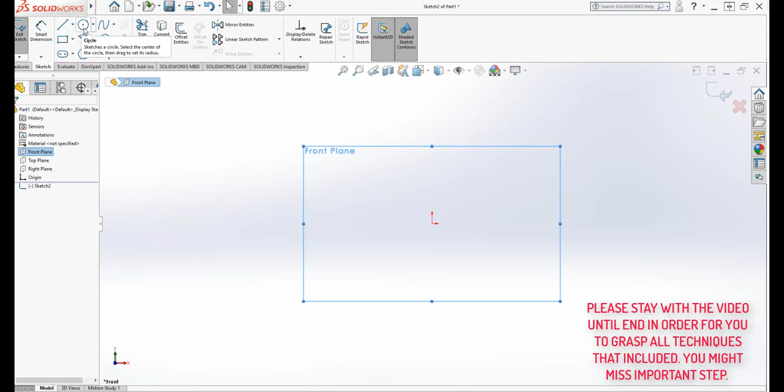First go to options, go to document properties, and use units with IPS, inch pounds and seconds. Press OK, close the dialog box, use smart dimension, and click the side of the circle.

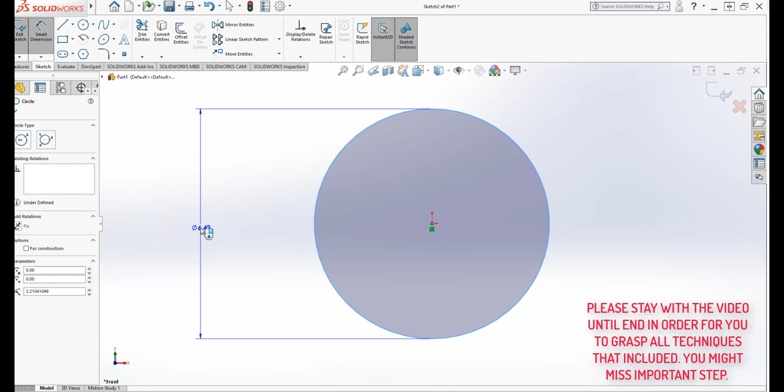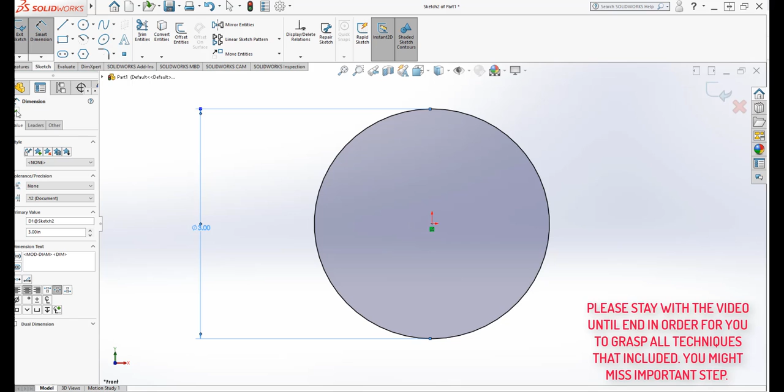It shows 6.42, but I wanted 3 inches. Press inch and regenerate the model with the current value. Press that one, click OK, and close the dialog box.

Now let's do another circle, a smaller one. Press the side, use 1.5 inch as the unit, press regenerate, and click OK.

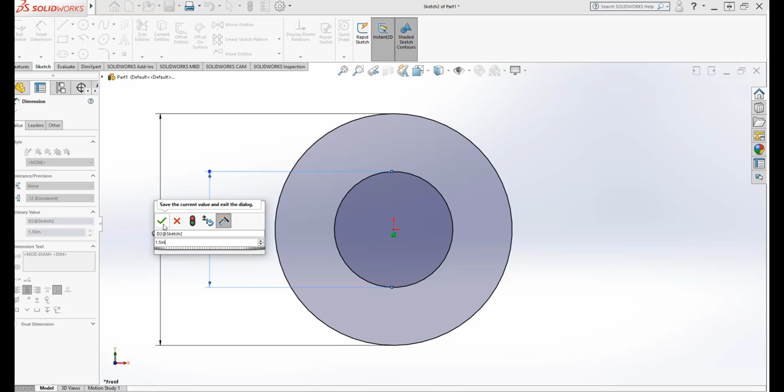Now we want to make it a solid from this drawing. Let's use extrude boss base, where I use mid plane every time.

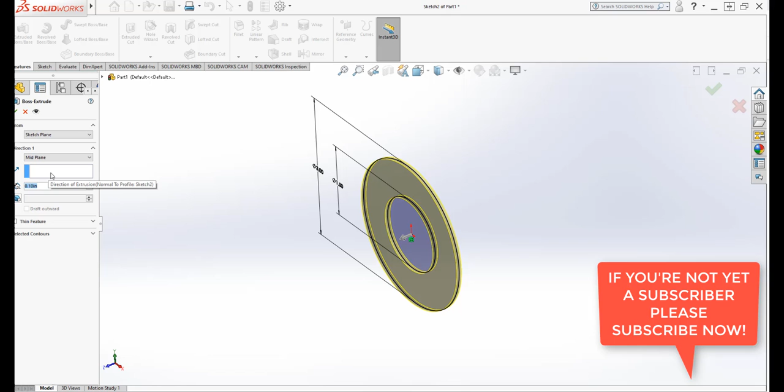Let's set the thickness of that drawing, maybe 2 inches. So that is 2 inch.

Press that one, or maybe we'll change it to 1.5 inch. So it shows the thickness I wanted. Press OK on the boss extrude dialog box, and now we've made a SolidWorks object.

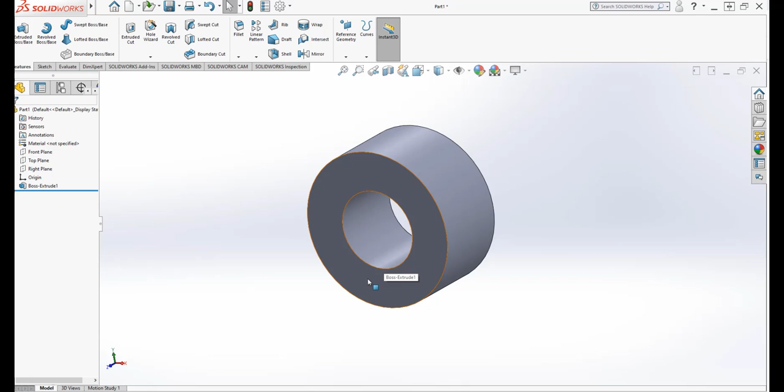Now I want some kind of key slot on this area. Press that one, go to normal to in front of you, and let's save the file first.

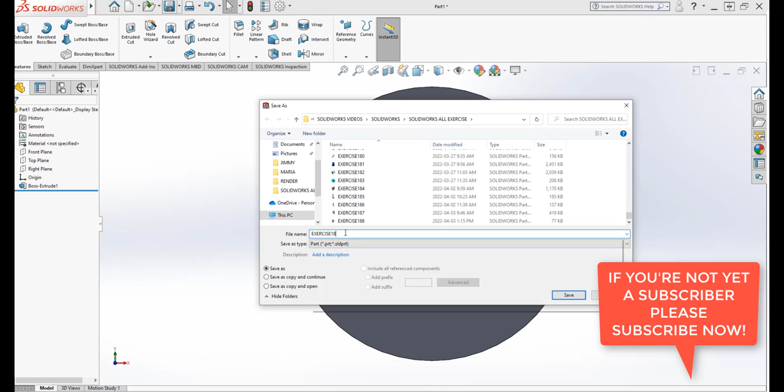Let's do the detail - this is exercise 189, so let's save it.

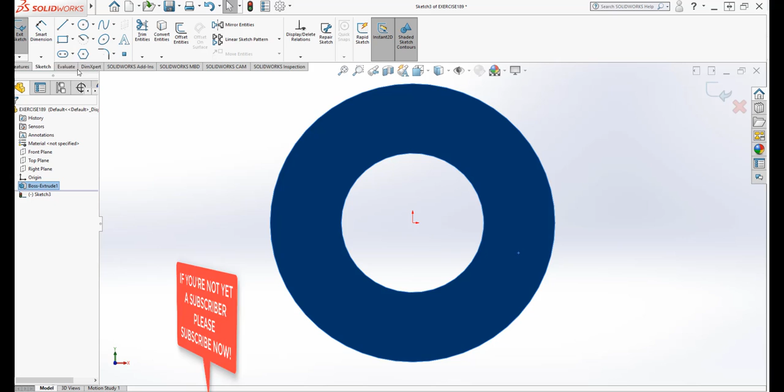Now let's do normal to, and then click sketch, and I want to have something like a corner rectangle.

Let's do a drawing from here, then use a center line connecting into the center and through here, and select.

Now use the smart dimension, let's put it as 0.45 inch. Press regenerate and click OK.

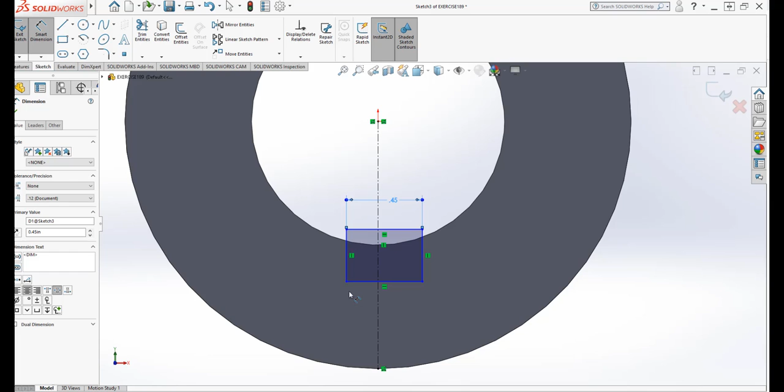I want this one in the center. Let's put the depth first - 0.45 also as the depth. Now they're all almost the same.

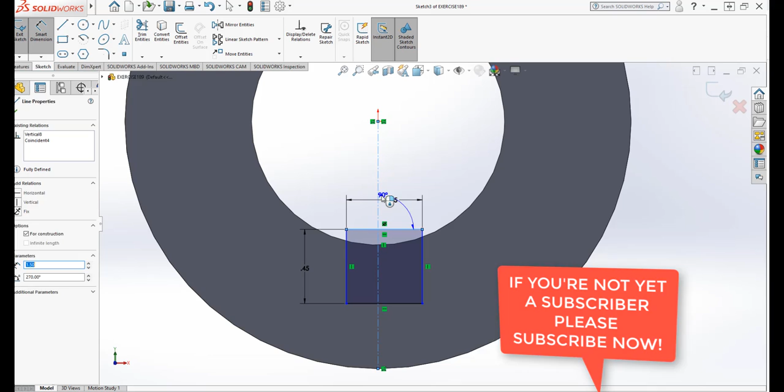Let's do some center, make sure from here, let's do some measurement again, from here to here - we'll make it 0.225.

Now it's centered. Then this one from smart dimension, let's do this one to here.

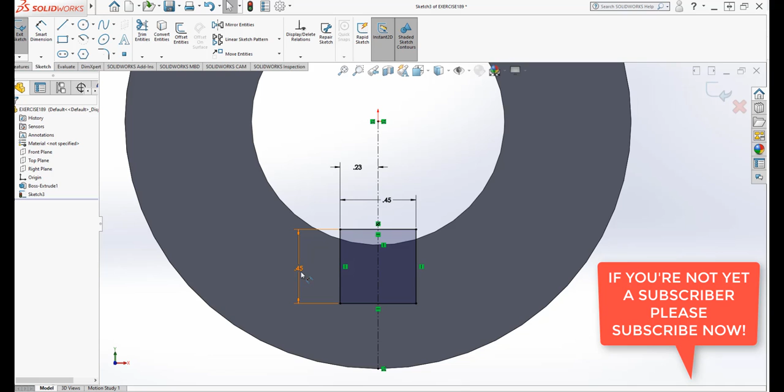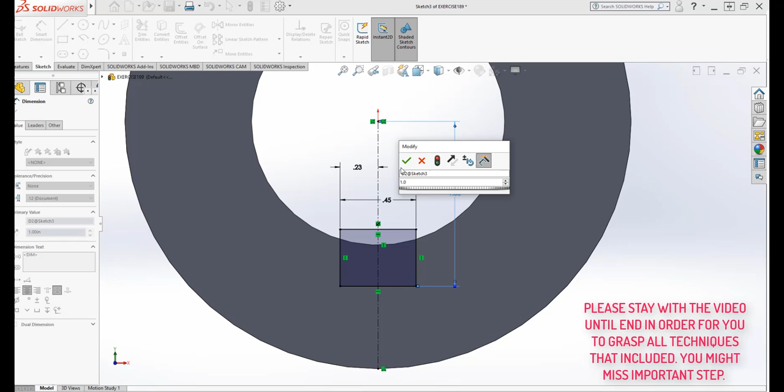Let's do 1.0. That's good, so this one will be different - that's 0.30. So that one is good.

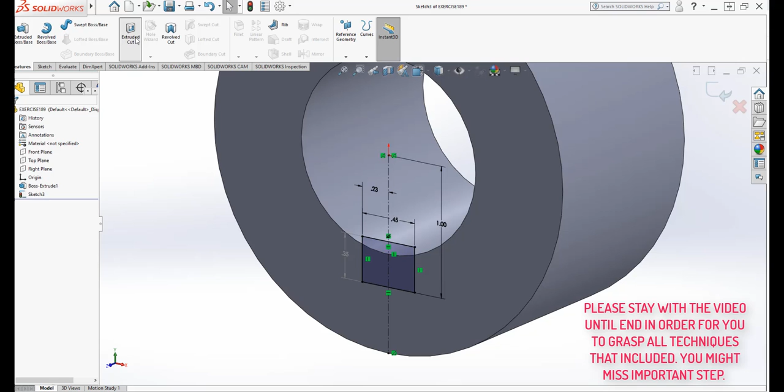And then we extrude - oops, no, not that one, extrude cut. Use extrude cut, you can see it will cut throughout the drawing.

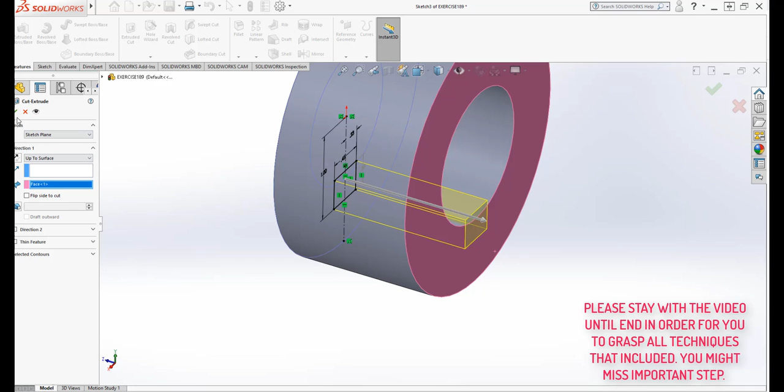But I wanted to stop here, so let's use up to surface. Great, so it goes in and cuts right through that end of the object.

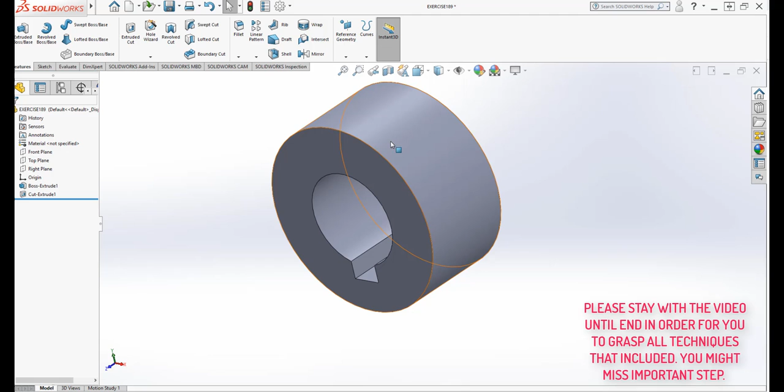Now I'm planning to have a gear to be here, up to here, on the middle. So let's do normal to with a sketch in it.

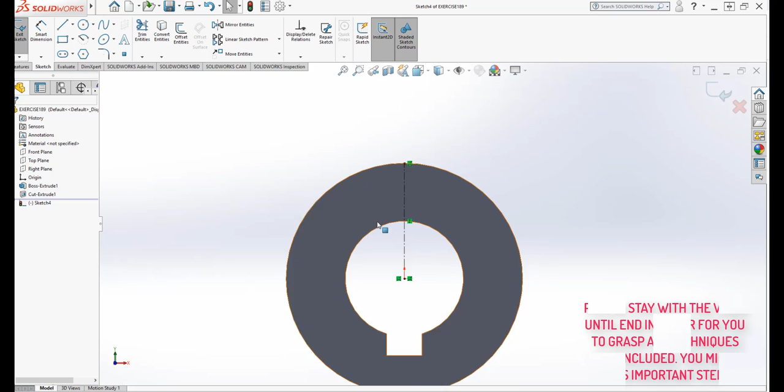Let's do another center line from here to here. Let's make sure, put some dimension of 0.5.

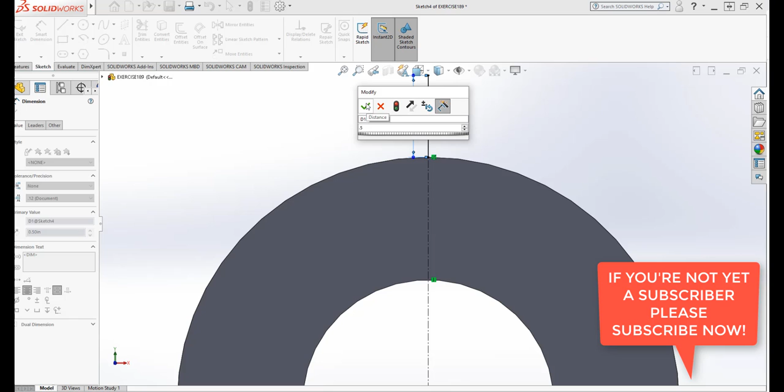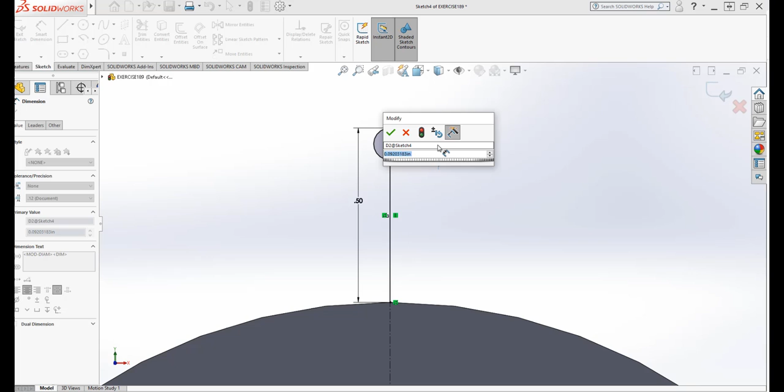And then let's make a circle - let's say the circle will be about 0.1. That's okay.

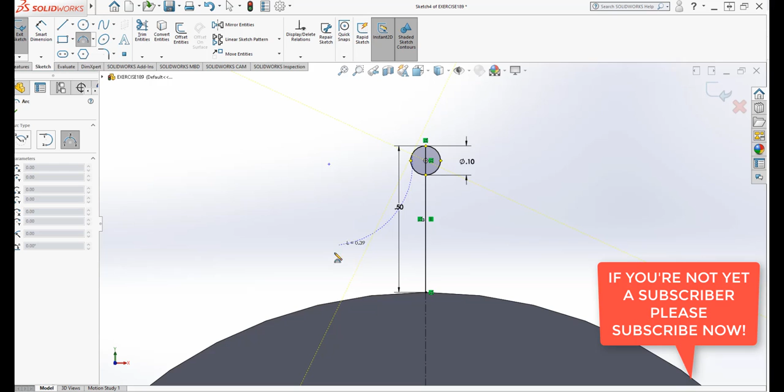Then let's do a 3-point arc, from here to here. Then we'll make it a little bit, okay, that one.

Let's do a mirror of those entities, mirroring from here to here, and press OK.

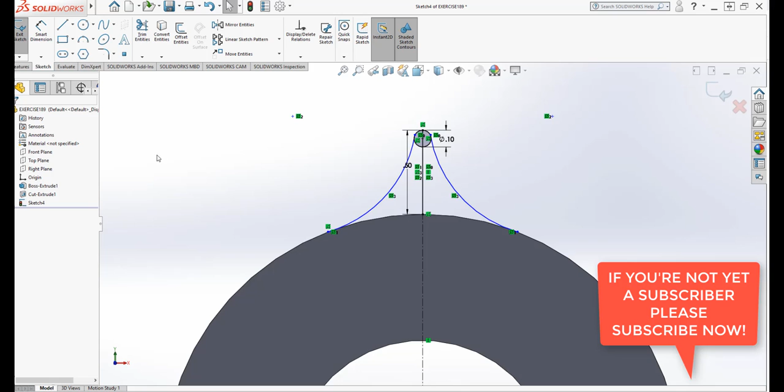So let's do this one and this one, press the shift key and click those arcs. Tangent 2 - let's make it tangent. So both of them are tangent already.

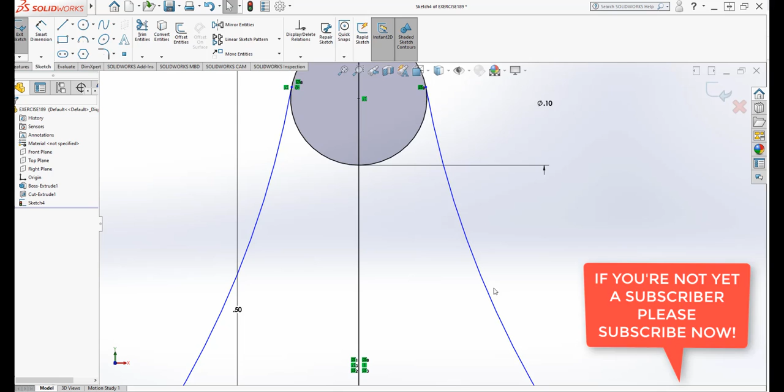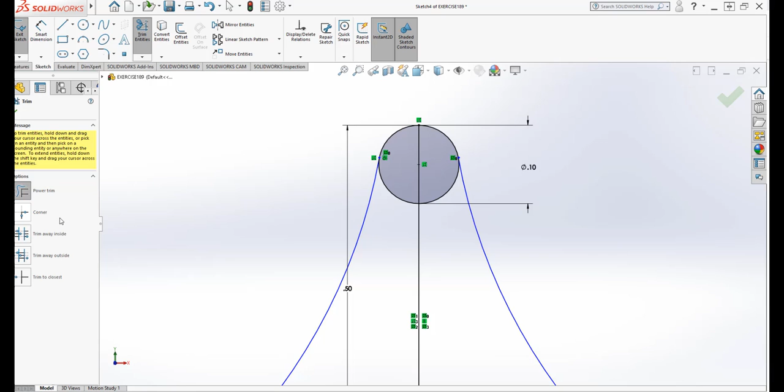And then let's go to sketch, trim entities to be power trimmed onto here - trim away inside, trim to closest. Now it's been trimmed.

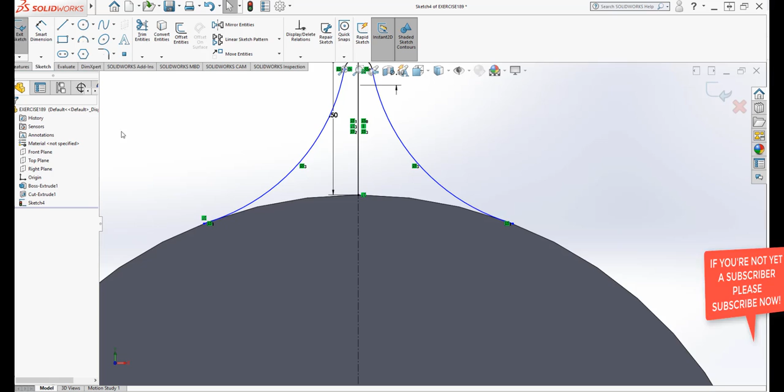And then let's do a point on arc from here to here to here. So there's an arc there.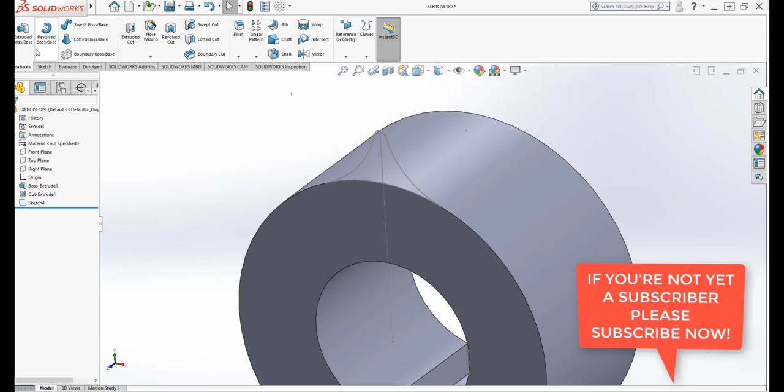And then let's do a picture to be extruded from here to this area, let's do some on the other end - 0.75 inch unit, just like that.

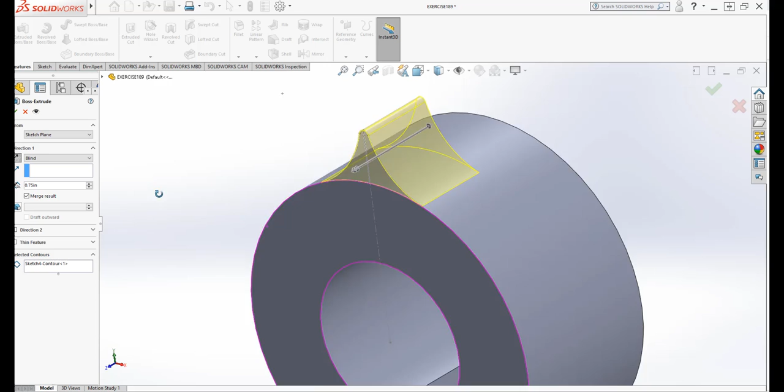Press OK, and now we have a small gear for the whole of the...

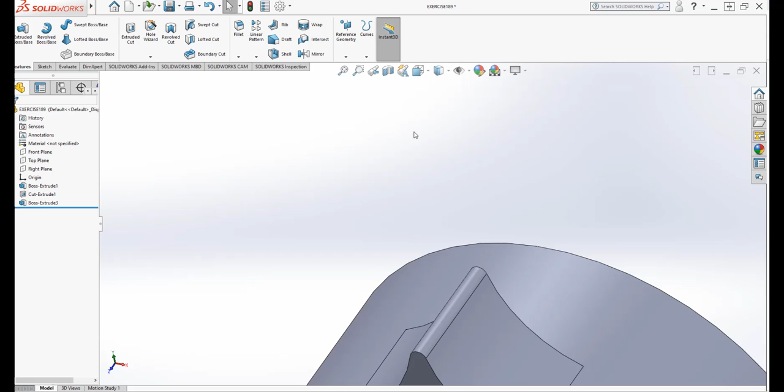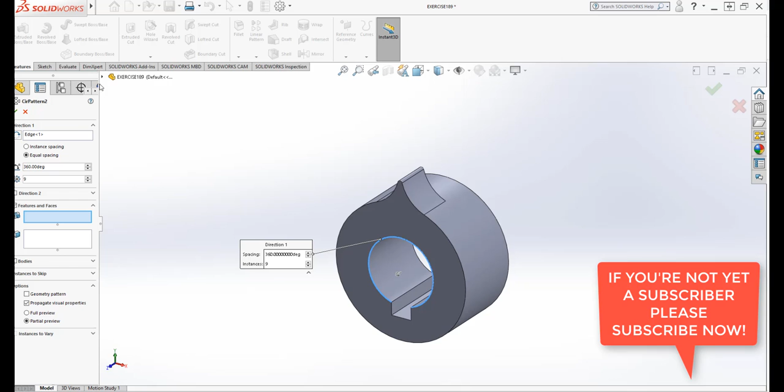And then we will do some pattern, the circle pattern with this. Let's put it as 9, with the center on here, so it will rotate at 360 degrees, and the feature itself will be this teeth. So the boss extrude is the teeth, going through 360 degrees at an instance of 9 teeth for the sprocket.

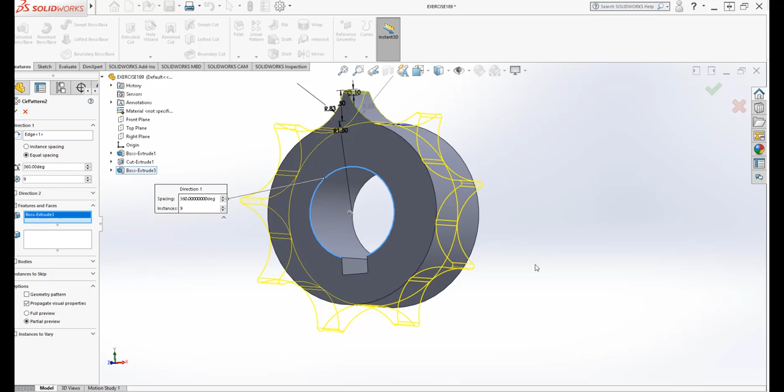It is a sprocket, not a gear. It is used for a sprocket, like on a bicycle. So we'll do it that way, and let's press OK.

So now we made the sprocket teeth. Let's do another - let's do the boss, because it's... let's edit the feature for the boss with this.

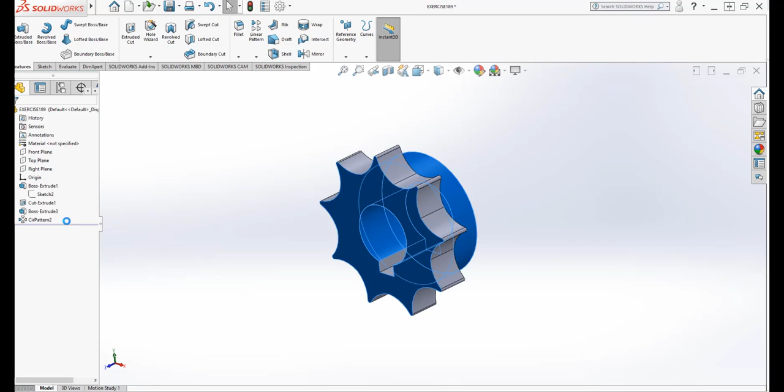Let's do it as 3 as the unit in inch. So that one will be bigger, right? So I want another one here, so we'll put another one.

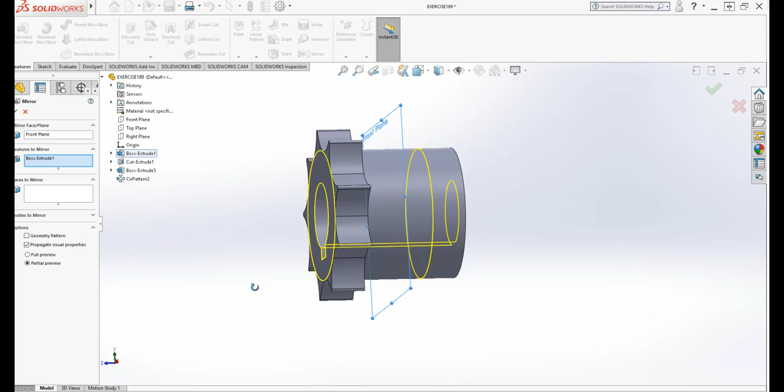It will be a mirror step, mirroring this area. So the mirror plane is the front plane itself, and the boss extrude, this one, will be mirrored on the other side of the end of the gear, or the sprocket.

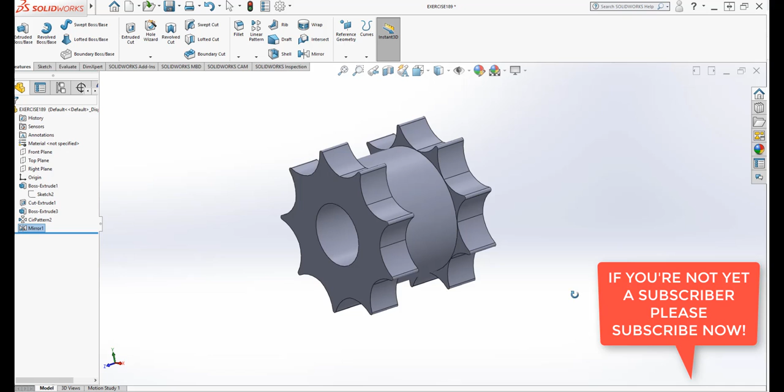Press OK, now you can see it's already mirrored. Let's say this one will be on the other end, so now the keyhole will be set to that end on the drawing.

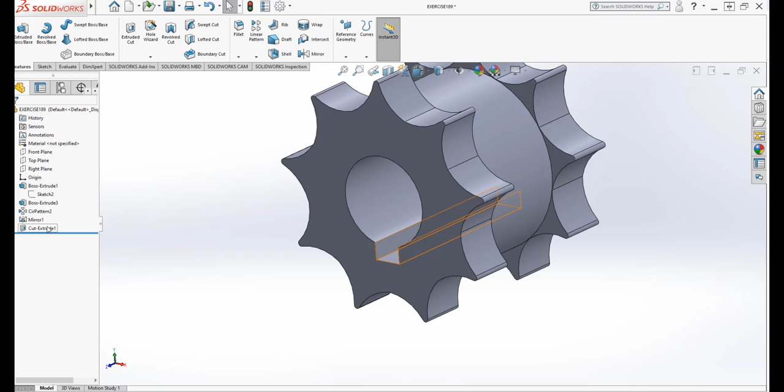I just push the cut extrude keyhole, so it will extrude on the other end on this side. Now both of them have a sprocket. Thank you for watching.